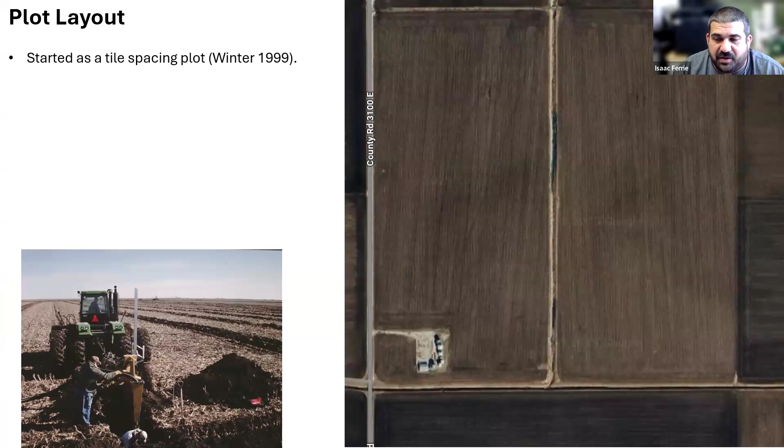But originally, this plot started as a tile spacing plot. So we put the mains there with the trencher, the rest went in with the farmer plow. And we have actually three 80s, but two 80s you can see in the picture with the drainage ditch that kind of tees in between them. And so we did runs with 120-foot spacing, 60-foot spacing, 30-foot spacing. We left a gap that probably should have been bigger as we got further into the trial, and repeated it on both 80s.

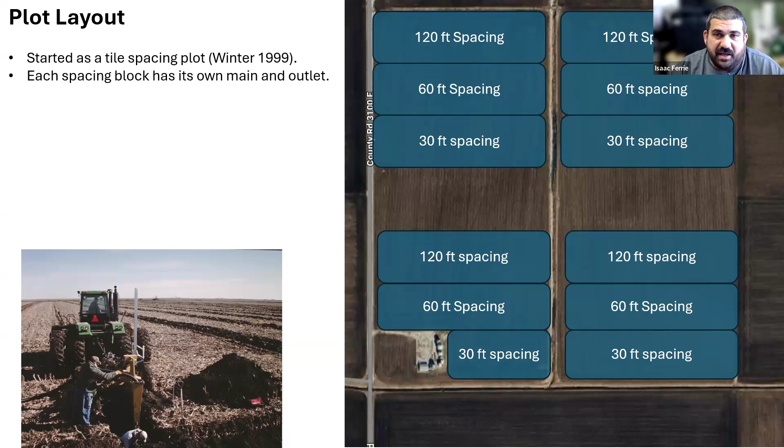So it started out as a tile spacing plot in 1999 into 2000 when we installed it. And we kind of managed it that way. We looked at yield differences that way to see what soil types and spacings work best. But each of these blocks has their own main and their own outlet into this drainage ditch. So the tile depth does vary slightly between the spacings based on contractor recommendations and the actual spacing that we have. So our larger spacings are slightly deeper.

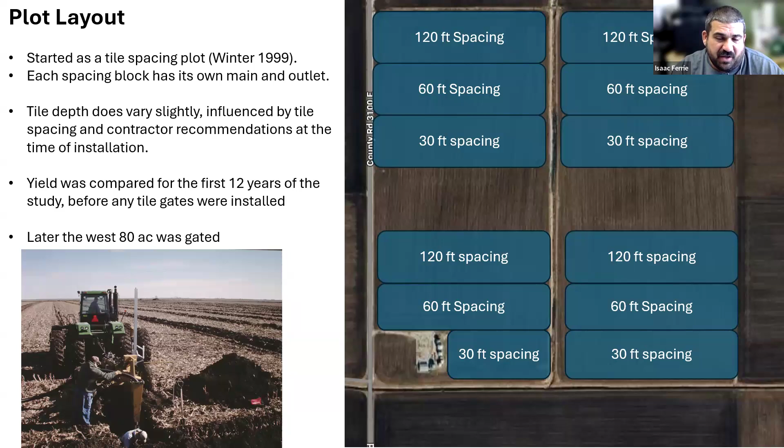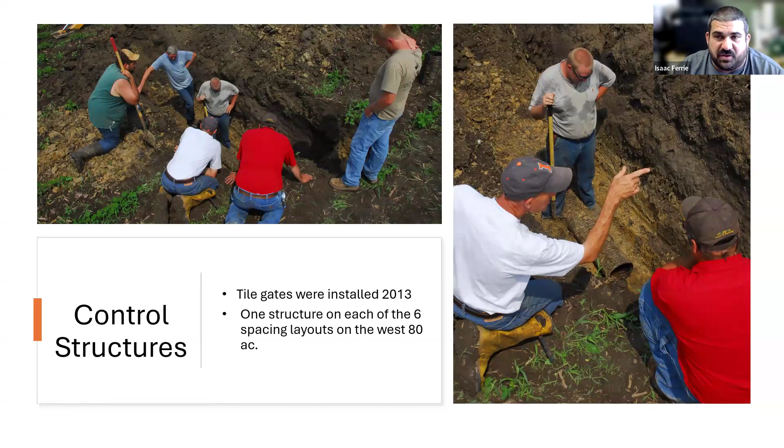But for the first 12 years, we looked at yield, comparing yield of the different spacings. One of the things that did is it gave us a very good baseline of differences in yield between the two 80s of land here. So then later on, we actually gated all of the systems on this west 80 and compared to the east 80, realizing those differences that were stated before. So in 2013, we installed the actual structures on each of the 6 spacings on the west 80.

Our primary focus throughout this whole plot, from the spacing to the gates, has always been on yield. So that's what we've been after the most: economically, what's it going to mean for our farmers. But we have done sporadic nutrient testing, looking at overall water quality and nutrient loss along the way.

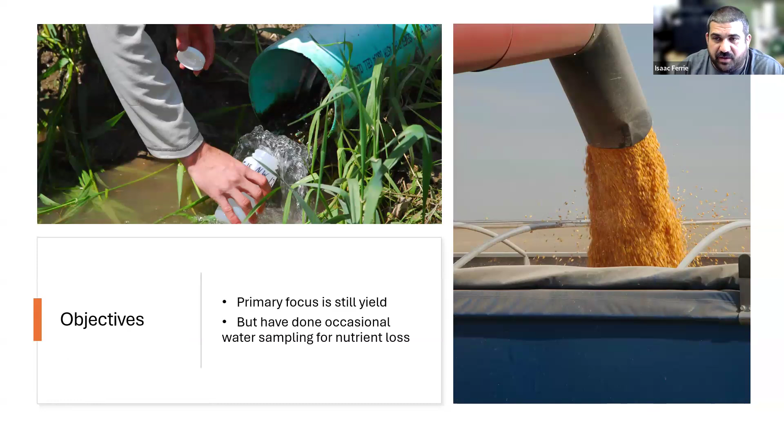Then in May of '22, within these gates, we did install the smart drainage system. So now we can start to look at these remotely. So before we had to manually change the gates and the structures, change the levels. And now we can not only remotely monitor where the water is, but we can remotely change the height that we want the gates to be at, or when we want to let water go, which makes the management style much easier.

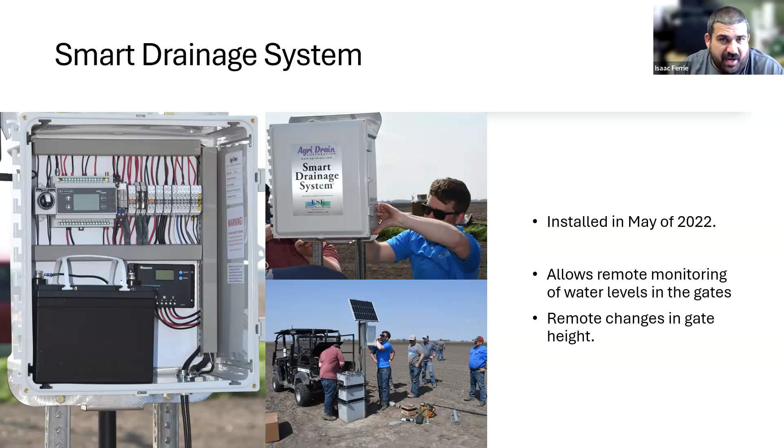And that's probably one of the big barriers to entry with some of our clients: the time constraint. How do I manage the water, and then what is the time constraint? So obviously being able to remotely see where the water is is much preferred over our old approach of having to go in and measure down to see where that water table is and then make adjustments on the fly.

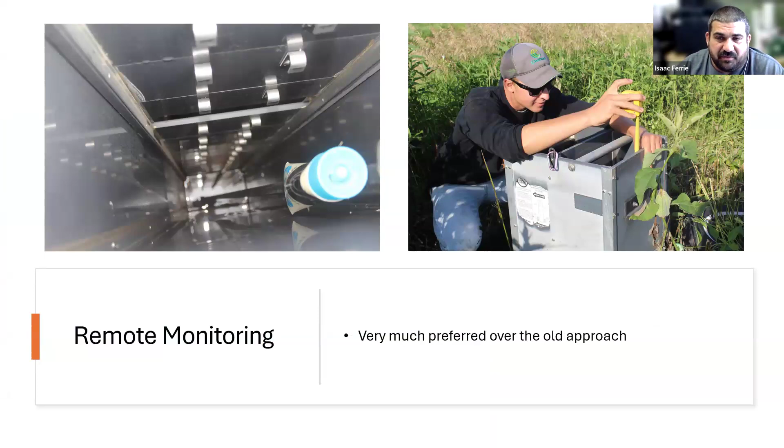So like I said, each spacing has its own main, its own outlet. And the big caveat here as we go through the results is the drainage ditch is close. So each of these has its own outlet. We have adequate drainage. It's all sized very well. So when we want to let water go, we can. We don't get backed up very often. We have good outlets. So that lessens some of the risk of holding too much water back, so that when we decide to let it go, we can get rid of the water pretty quick.

So as we go through results, it may vary on how you would have to control these structures if your outlet is undersized or you can't get the water away as fast as we can here. So like I said, close outlets, we have the drainage ditch teeing through there with adequate supply, and we'll test the drainage from time to time.

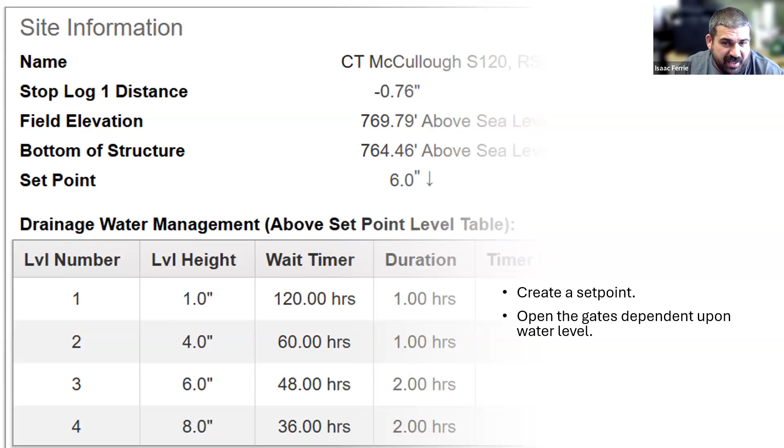It allows us to be more reactive, see what actually happens and then react to it, so we don't have to let water go that we don't need to, and it's pretty responsive. So it takes a lot of the guesswork out of doing that. A lot of the worry on our part, our biggest fear, and all farmers fear it: they know the benefit of tile, and now you're talking about stopping the tile or gating it. So I know the tile's giving me a benefit. Our farmers are very worried about doing anything that's going to undo the benefit of the tile out there, and this removes some of that worry.

And so you can kind of see here are a couple rain events, if I can actually show where you can see the rain event. We bring the water up in the box. Our set point right now is up here, and you'll see that water start to recede a little bit. We get another rain event. It doesn't get to our set point, so we never open the box in this scenario.

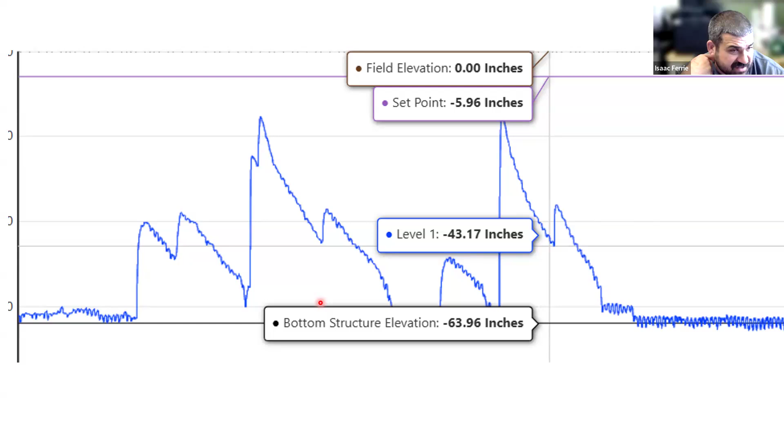Had we gotten more and got above this purple line, it would have. But then this water is going back into the soil or leaking out the system. We realize too that with the drainage ditches running through the farm, it is a fairly leaky system. But that's what we have to deal with. So here you can kind of see the water in the box.

June 3rd, we were dry coming up into that. This is a 2-inch rain event that still didn't get us above our set point, so we didn't let any go. In our previous system, we would have lowered our blocks if we were anticipating this big rain, and we would have let some of this water run out the tile. This tells you we didn't let any run out the tile, but it all absorbed back into the system, followed by another 7/10 rain a few days later.

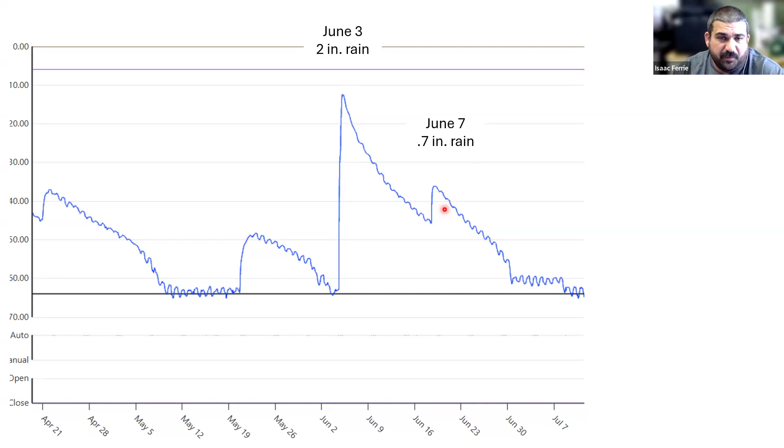So just for our peace of mind, being able to watch that remotely and then make those adjustments, because our biggest thing in tile gates is letting too much water go too early, because we don't get it back. And so not only in the box, but we have soil moisture sensors out there, different amounts each year depending on what we're really wanting to key in on.

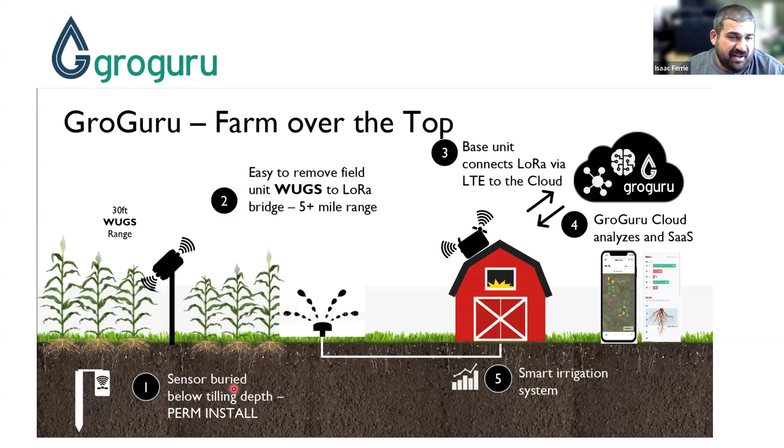These Sentek moisture sensors have sensors every 4 to 6 inches all the way down through. We've used those in the past and use them continually. And then we do have a couple of GroGuru sensors that are completely buried. The oldest ones I think are going now 5 years buried, and they're still reporting, which is pretty amazing. The only downfall is we start recording at about 19 inches because we want to be below tillage depth where we buried them, so we're not hitting them. So we have to add an auxiliary sensor to get that surface sometimes.

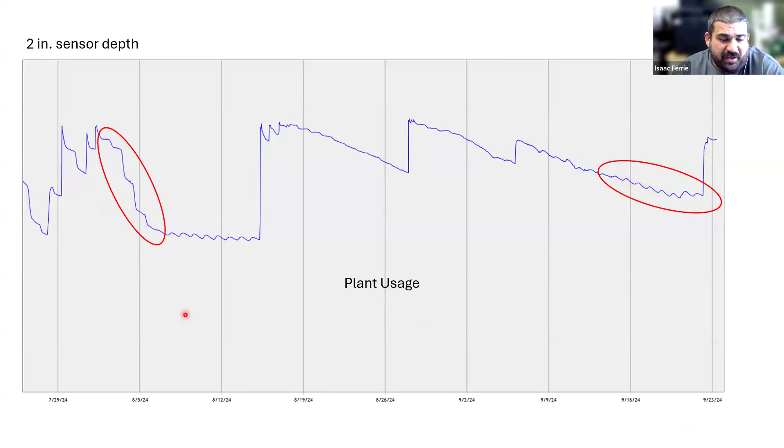But if we look here at this 2-inch sensor depth, one of the things that we can see is plant usage. This drawdown during the day, levels off at night, draws down during the day. So we're in the root zone here watching overall plant usage. We draw down, and then we actually get a slight rebound at night as that water comes up, and draw down. So we can see the plant usage. We know where the plant is using water with the sensors, which is kind of nice.

We can actually measure that plant usage through the water sensors to figure out on average what we were losing each of those days, how much water we actually need, which is helpful in irrigation, but also nice to make comparisons on our gated versus non-gated, how much water they have available to them. So here's a snippet from our buried soil sensor from 2024. A couple things we just wanted to point out that we noticed along the way.

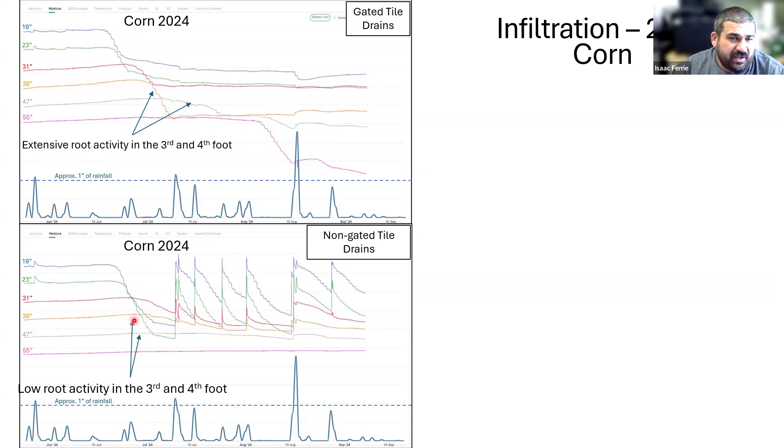Here you can actually see this is on the gated side where we're holding water back. We have root activity down in that 3rd and 4th foot of depth. And this is middle of July. When we go to the non-gated side, those sensor levels show hardly any to no root activity at that depth. So we are taking water up at that depth where we're not in the non-gated side.

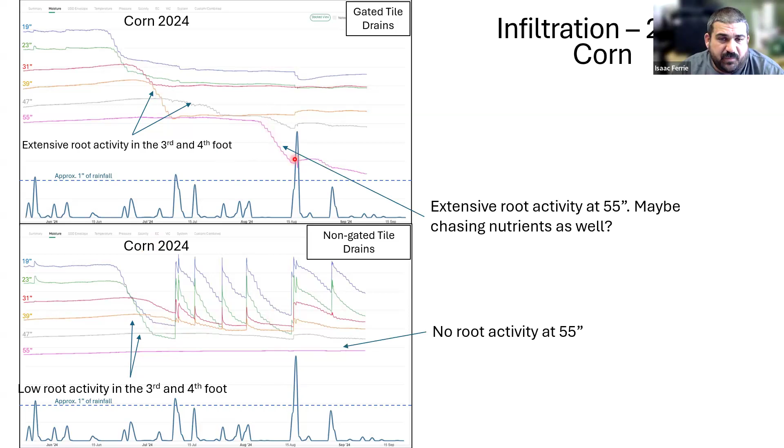So root activity is deeper during this dry spell. At the 55-inch, no activity, and we're actually getting into root activity down here lower. So we typically see this. We see deeper root activity where we gated. We're getting penetration of roots and water uptake.

And the other thing you'll notice here is these are rain events. So anytime we're above this blue line is about 1 inch. Realize that this sensor is buried, so the first reading we're getting is 19 inches. These rain events are not showing up on this sensor. We're soaking it up in that first 19 inches.

But the problem here is in our non-gated side that is drier, our cracks and preferential flow we've noticed become increasing. It's a big increasing deficit. So a lot of times it'll take 2 or 3 rains before we actually swell enough to close those cracks. And that's kind of what it shows here

is these cracks. So we have a big rain event. We are getting water spikes down to that 31, 39-inch level, almost at the same rate that we're seeing it at the surface. So our preferential flow of water down to tile depth is very fast, very quick. And then you see a little bit of delay as we go, a little bit more wetting, and a little bit more separation, but it gets better out here. But that's the biggest thing we're trying to correct.

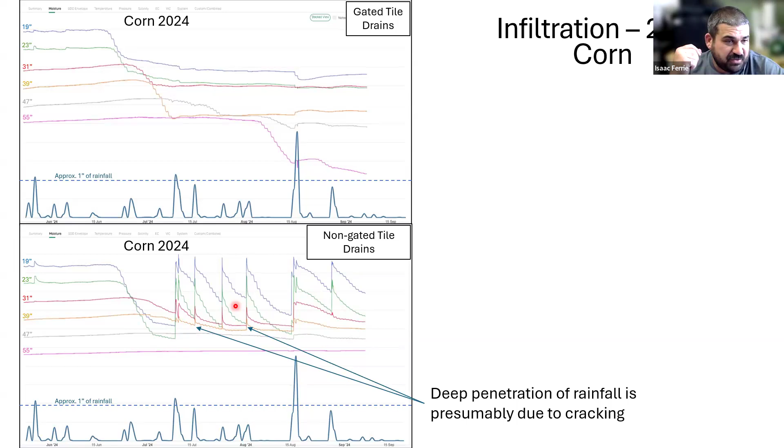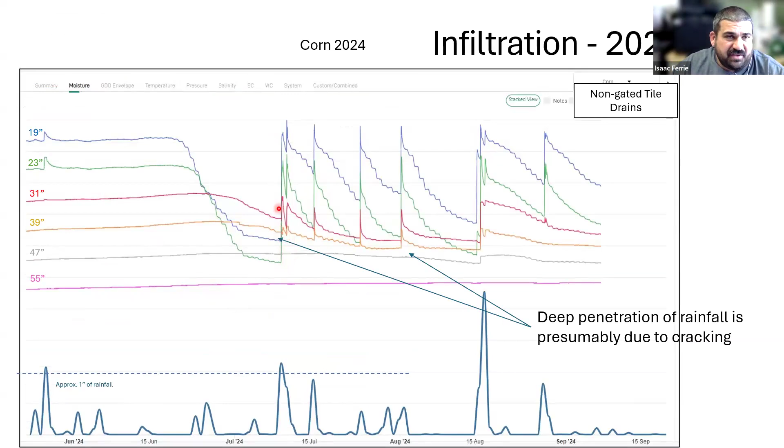Our tile gates, we're holding water back in the spring, but in reality, once we get through spring, that water's gone. Like, we're not holding it late into the season. Our biggest benefit, we believe, from the tile gates is mid to late season rains that we stop from leaving, that were going through the soil with preferential flow way too fast. And we allow them to soak back in. And you can just see a little bit here where we zoom in on it as we're seeing the spike at 23 inches, at the same time we're seeing that spike at 31 inches.

And so here's what we're seeing. We kind of relate it to a sponge. So if you have a rock hard sponge and you dip it into a bucket of water and pull it out really quick, you don't pick up much water. But if you dip it in the bucket and you let it sit there for a while and you pull it out, it can be full of water. And that's essentially mid to late season. That's what we're trying to do at the gate.

So you can see here, we're getting to the end of June, into July, we're starting to get dry. The rain event happens, it can hit the gates, it can back up. We're not letting it go for a specific amount of time, with the hopes that, like soaking that sponge, that soil starts to absorb that water back in and we don't let it go. And that's the most important on that biggest flush and really dry dirt.

So we get a big rain with big cracks, it's going to get to the tile quick and it leaves. And so all of a sudden we have a big rain event that we didn't get much benefit from because it got to the tile too quickly. And that's what our sensors were showing. We were getting down to 24 easily, but 39, 40 inches of depth with that water so quickly after the rain event. And we noticed that on some catches later on too.

But in this one right here, this is the non-gated side, this is the gated side. Our first rain event here, there's barely a little bump on these overall moisture sensors on the average through there, where we see a pretty good spike on our overall moisture on that first rain event. Then we have a second rain event here. We see the spike, but here on that second rain event, we're already into what we would call our adequate soil moisture stage. And then a third rain event, a fourth rain event.

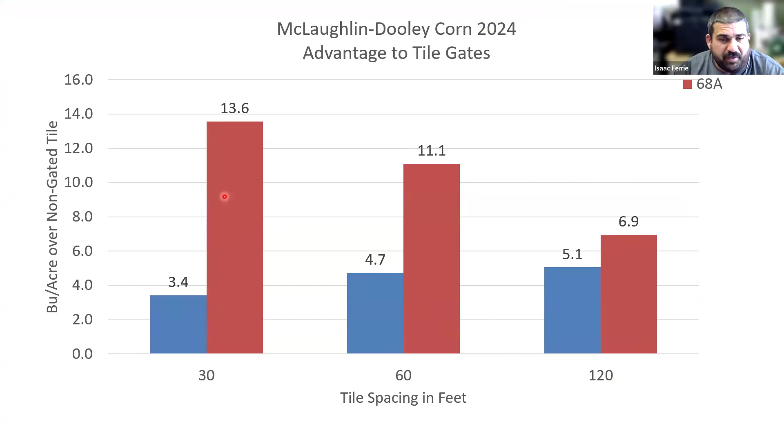And so these are yield advantages to gates. This is just 2024, but we do have 30, 60, 120 foot spacing. These are 2 soil types in the field. So we can see there is some correlation to soil type. There is some correlation to overall spacing. The way we manage it, our 30-foot spacings seem to do a little bit better, partly because we manage it to move water fast and hold on to it as long as possible. And our 30-foot spacings do a pretty good job of getting rid of water when we need to really fast.

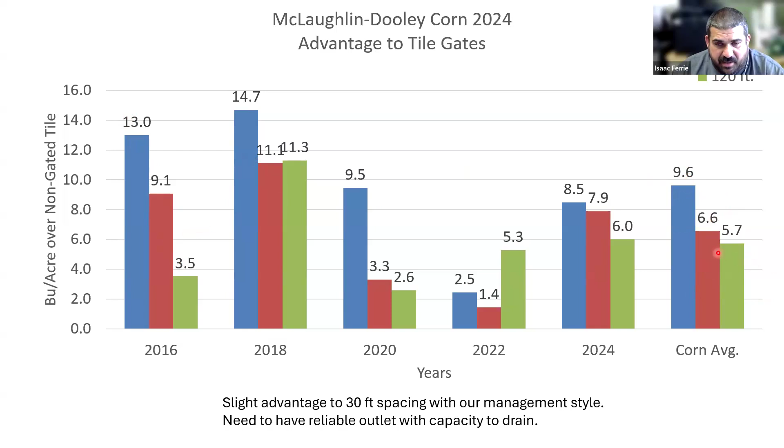And this is just a summary. We don't have the yields fully analyzed for this year yet, but this is just corn. You can look at the different spacings, 30, 60, or 120 foot. So we do have a slight advantage, anywhere from 6 to 9 bushel over the last 5 to 6 years, on overall corn. So if we average all those spacings together for those years it was in corn, we're seeing just over a 7 bushel response to the tile gates on top of any response that we're already getting from adding the tile to the field.

We look at beans the same way. Here we have beans through there. We're holding up just under a 4 bushel response to beans. So one of the things we push with our clientele when we look at overall costs of a whole tile system, adding tile gates is not that big of an expense to be able to return another 4 bushel in beans, another 7 bushel in corn on average over the course of the study. But I think a lot of that comes from being able to recharge that water on those different rains later in the season.

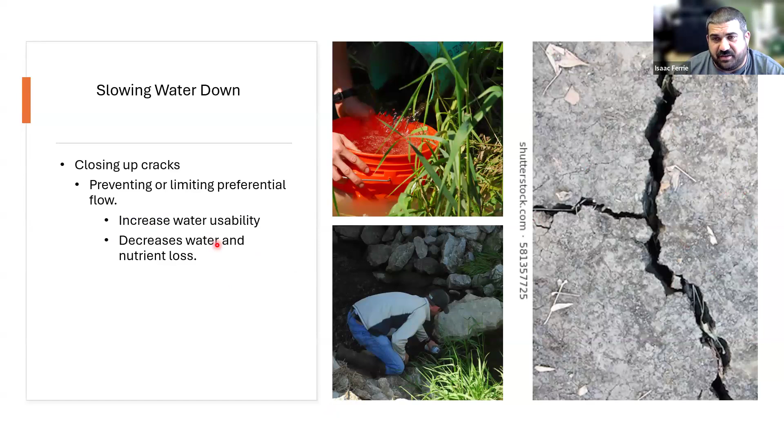Slowing water down, closing up these cracks does decrease nutrient loss. We've done sporadic testing at different times to look at it. So here would be an example. We did flow catches at each one of the outlets before anticipated rain. We came back the next morning and did flow catches, and then basically we did them every 24 hours over the next week. And one thing we can see is we checked it at 5 to 6 o'clock at night when we did our first flow. It was 8 a.m. the next morning when we did our next catch, and we got 1.6 inches of rain overnight. The tile hit peak flow very fast, which is another indicator of how quickly this water is getting down to the tile.

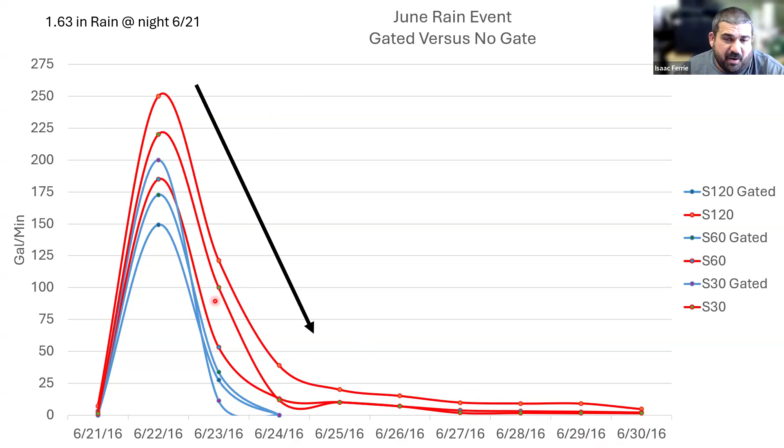It's kind of jumbled, but what you'll see here is all the red ones are the free-flowing tile, all the blue ones are the tile gates, depending on spacing affected flow. But our blue gated tile, and this was before automation, so we just had our manual gates. We are flowing less water over the top of the manual gates, holding more back, and that tile stopped flowing as soon as we got rid of the excess water, whereas our free-flowing kept flowing days after that. But big peak, big draw, which kind of shows back to our system, our field. The water moves very quickly. We get to the outlets pretty quickly.

When we look at nitrate results out here, they're about the same. But in here, like on our 120, not only are we flowing more water on our free-flowing tile, but the nitrate load in that water was higher than our lower flowing gated side.

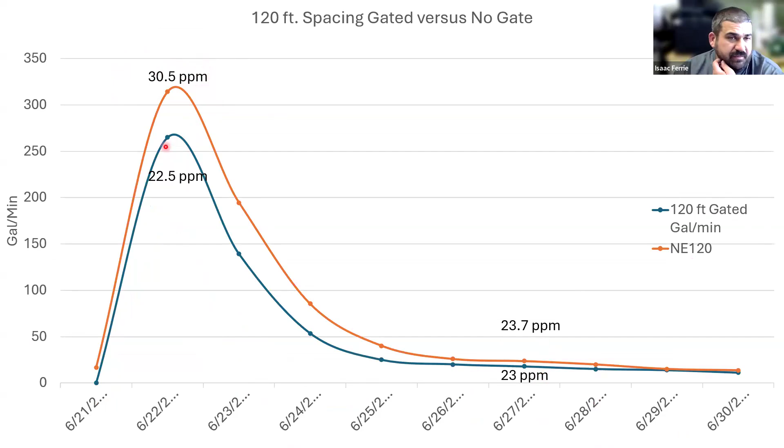So on average there with our non-gated, we're losing 7.6 pounds per acre per day. Down here, because the flow is down, we're only losing about 0.25 pounds, or a quarter of a pound of N per acre per day, if it keeps flowing at this rate. But our big losses are coming in those first 2 days after the rain, or that first flush where that water was moving through so quickly and you have so much of it.

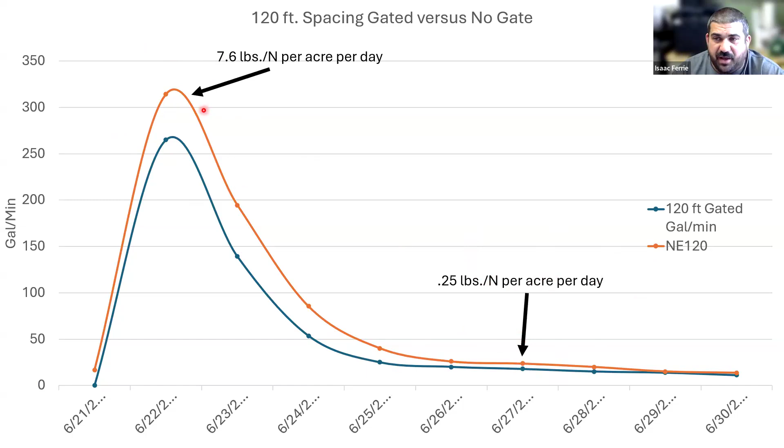And so you can see, in this, we looked at our different spacing. Our gated, we lost 153 pounds based on those flows versus 258. So this is kind of 14 pounds per acre versus 23. So by gating the tile manually in this case, we are reducing our overall nutrient loss, nitrogen loss through there. Roughly a 40% reduction, which is really exciting.

But it does go back to, we looked at just the overall nitrate lost over that week of the rain. 70% of our loss, whether it was in the gated side or the non-gated side, we lost 70% of those nutrients in those first 2 days. So that's where I think on the automated side, it's even better. Holding that water back for that initial flush of water and letting it soak in becomes insanely important.

And then just wrapping up, for our farmers, it is about economics, always economics. So we have very nature conservative farmers that care about soil health, that care about soil tilth, conservation, everything else. But in the end, they do have to make money and feed their family, or they're not going to be there the following year. So going back to the yield benefits is pretty important.